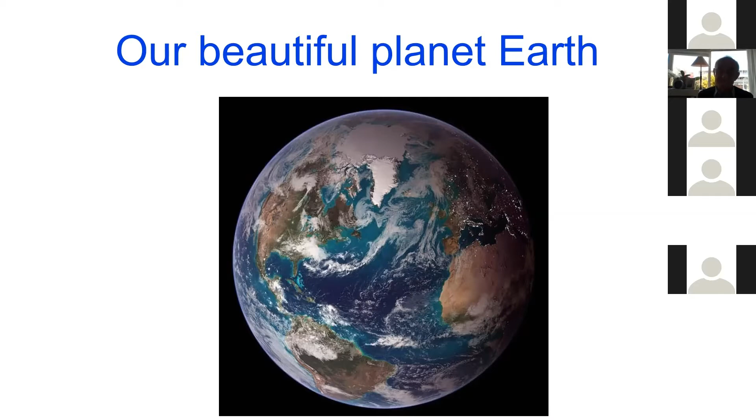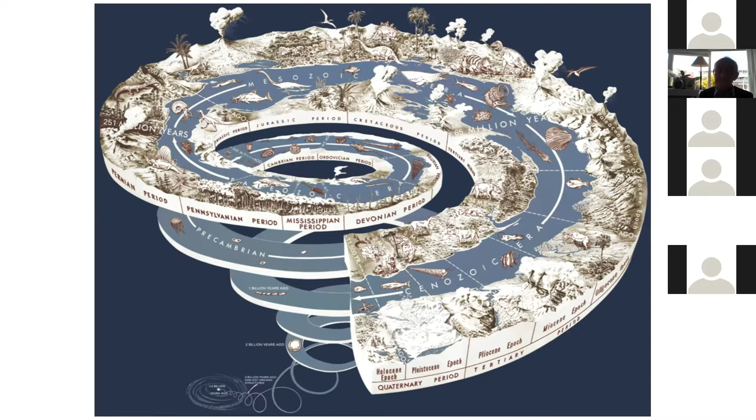So we have to do something—even without all these environmental and climate change problems—something basic, to change our way of living and consumption so that we bring it into balance. We have about 30 to 40 years to bring it into balance, and then develop a way of living in cities, in economy, in our activities that is in balance with what our planet can support. Otherwise, changes can be irreversible, and after that the big question is whether it will be possible at all to change.

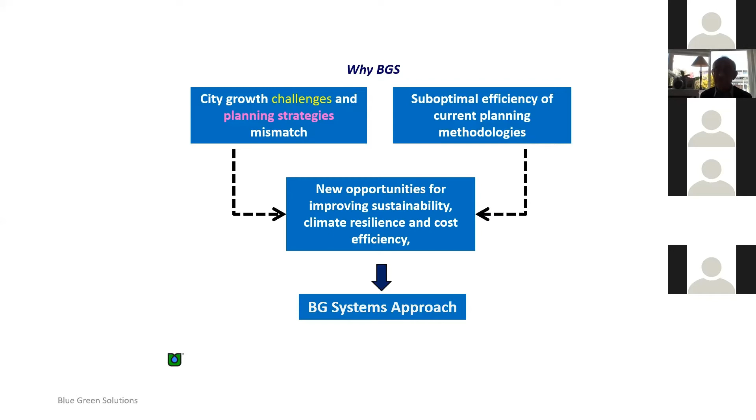This is a new need and new opportunity for improving sustainability, climate resilience, efficiency, and everything we do must be cheaper than classical approaches. That's what we call the blue-green systems approach, which I'm going to present to you today.

I told you not less than 20 years ago in France, 40,000 people died in 3 days just because of a slightly higher temperature which they were not used to. And that is connected to many other socio-economic problems.

Robbery, drug addiction, alcoholism, homelessness - we solve environmental problems, and there are very good examples in the world. For example, the city of Philadelphia: solving environmental problems significantly reduces socio-economic problems. That is linked, it's strongly correlated, and I will show you how.

We also have problems with energy efficiency and so on. So these are all things people see as a problem. We don't see it as a problem - we see them as a huge opportunity to change our brains, to change our philosophy, to change our planning methodology, to change our economy planning, and create new opportunities.

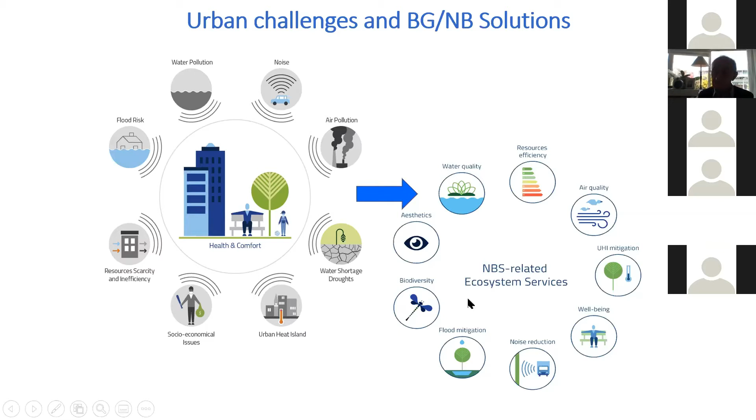That is environmental economy, environmental engineering - environmental systems are the economy of the future. I've seen already in some countries these environmental companies becoming much stronger, and they say in about 20 to 30 years, all traditional economies like oil, gas, and other types of energy will gradually be replaced, hopefully, by this new economy. This is a simple approach for how we can make it happen.

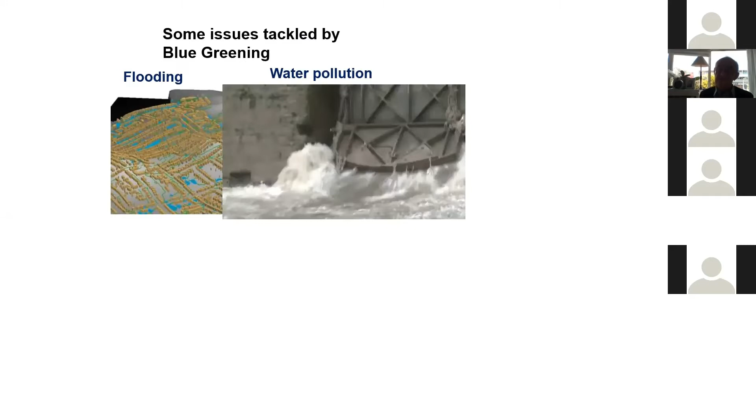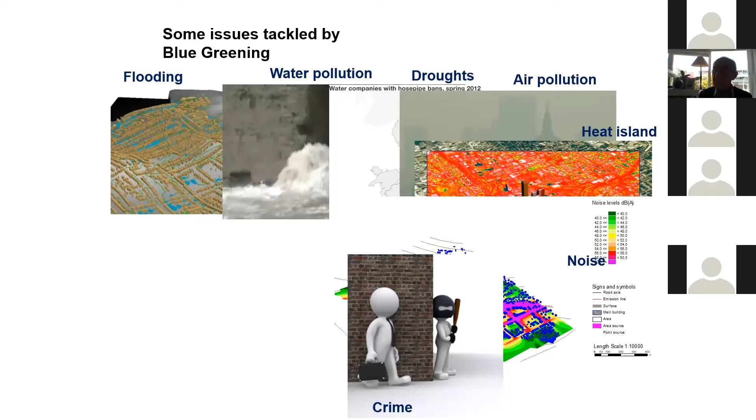Air pollution - this is not Beijing, this is Paris. Then we have noise and heat island - I mentioned how many people were killed by the heat island in France, and that happens every year. Noise, and then we also have the problem of socio-economic crime, which is much stronger in parts of the city with poor environment, where people do not have the luxury of enjoying green spaces. That is something very important for you.

Then we have urban agriculture. Food is becoming scarce these days - many shops are empty, but that is only a crisis; it doesn't have to be. Slowly we will need more food, and we have to grow more food near the place where we live. You won't believe it, but you can grow 30-40% of food in a city - on your balcony, your facade, the roof, the cellar, and so on. That is urban agriculture.

We need much more energy efficient systems. We are hoping that we will introduce renewable energy, wind, and so on. But at the same time, our technological systems are inefficient, they spend much more energy, so all this new renewable energy is being wasted. The biggest renewable energy is not spending more energy than it produces. I will show you some examples on wastewater treatment plants and heating and cooling buildings and so on.

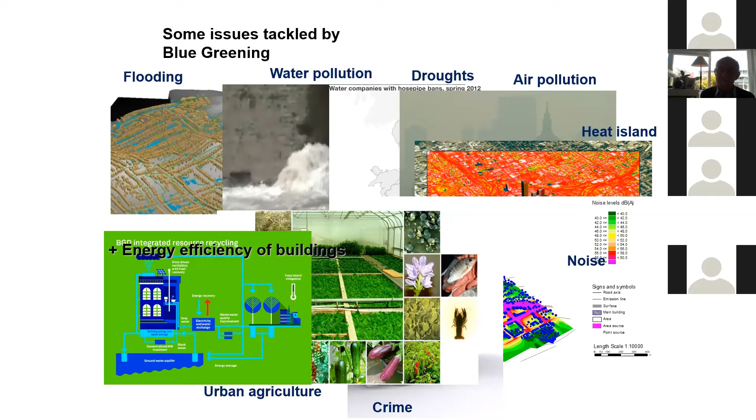In conclusion, with this blue-green philosophy we have developed, we will demonstrate to you how this philosophy works. People of the social background, sociologists, psychologists, economists, and people working in media have a very strong role, because without this group of people we cannot implement it. You can have brilliant technology, but if it's not supported, it's not accepted, it doesn't work.

This is the current system. We have many experts working, and everybody claims they have the best technology, they have green, they have zero carbon, zero whatever, but all of them are doing it a little bit separately, and there is no system.

We have developed this blue-green philosophy where we introduce this technology in the very early phase of planning - planning for economy, planning for cities, planning for new factories, planning for new hospitals. Everything can be done much, much better if it's done in the beginning, and if we bring all these people together and they agree on the environmental framework.

After that, they can go back and do their own job. Architects, environmental and transportation people can do that, but within the agreed framework. And that requires a change of our brains, our mental setup, our ways of doing things.

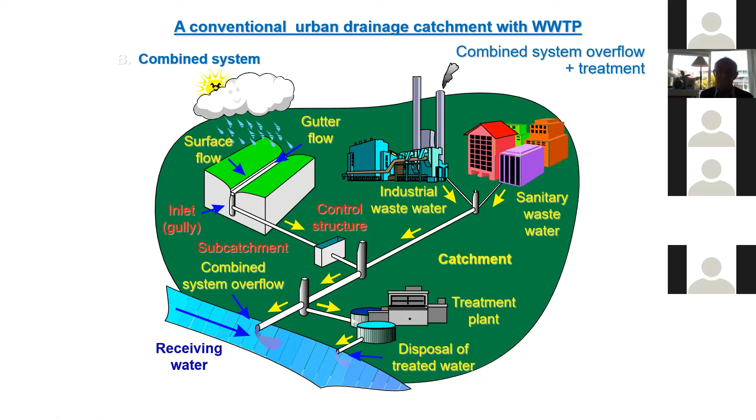And if we tap into groundwater - I'll show you an example from Paris - and use it for heating and cooling a building, immediately we reduce the waste, we recycle. We are already starting to implement this blue-green circular economy philosophy, and we are gradually converging to what we call cities of the future.

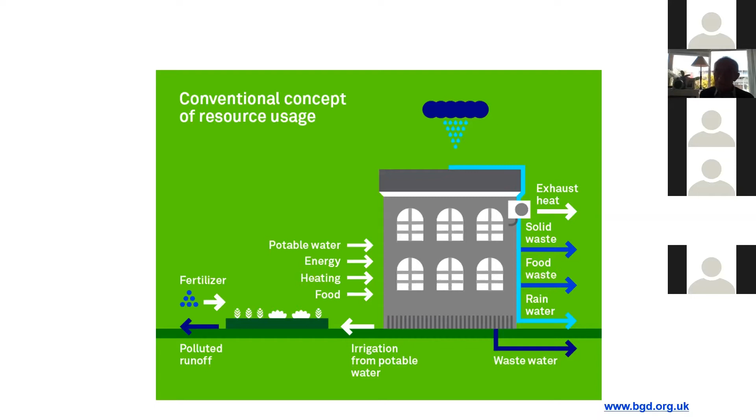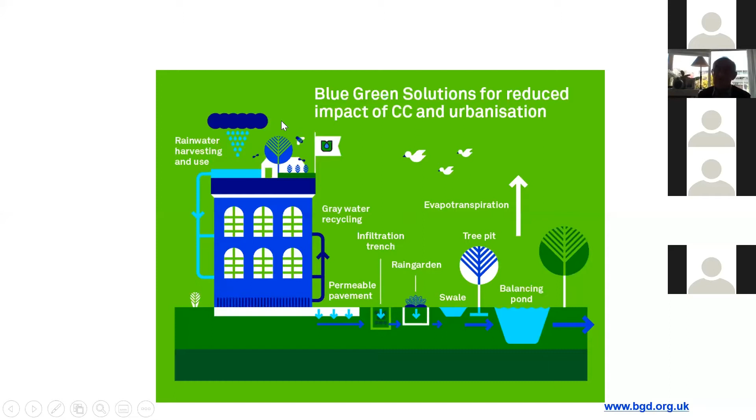So this is how it works. If we have the same house, if we harvest the water, if we use groundwater, if we capture the water after taking a shower, and take that energy which is in the wastewater and return it back to our boiler, and we use our green spaces around the area for improving things like evaporative cooling - all these are local resources which we can implement, and this is the essence of our philosophy.

For example, we don't just call it a green roof, but a multifunctional roof garden and green facade - they are not just there to be nice. At the moment, people are building green roofs just because they think it looks nice, but it looks nice and they don't even go to see it.

This other way, we put space on the roof where we can grow fish, we can have meetings, we can have a nice area where people can take a break, sit and stay there, drink coffee. And there's an excellent example - you can have beehives that produce honey. Honey produced in cities is even healthier than in rural areas because it doesn't have pesticides or herbicides.

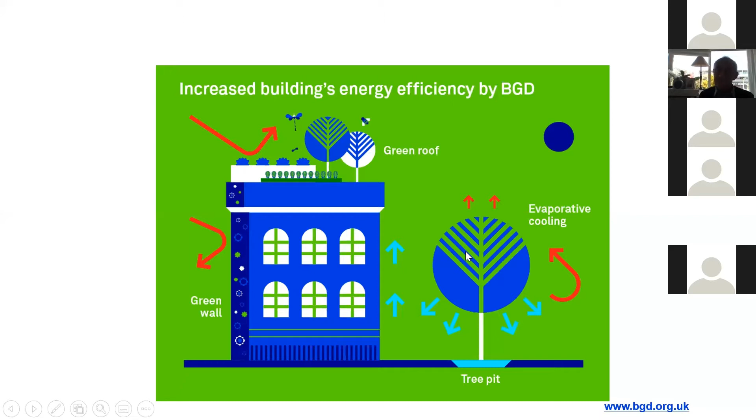Although cities are more polluted, at least the bees can collect without pesticides and herbicides, so unbelievably, honey produced in cities by these bees is healthier. And also, trees are not just trees - they have many other, about 30 different functions. They can be used for heating, cooling, and other purposes. So this is another example - we can grow food.

By growing food in Singapore, there are buildings which are already growing about 30% of the food they need. Cucumbers, beans, tomato, fish, everything in the building. Then we reduce the need for transporting food, we reduce the pollution and so on.

Biodiversity is very important. By our technology, we are killing many insects, bees, animals, and so on. We have to bring this element of biodiversity into the city, make it more pleasant, but also much healthier. At the moment, we've just received another European project on environment and health, and how we plan cities to be healthy, with partners from Poland.

So if we put all these things together, problems and solutions, we have what we call blue-green solutions. In essence, we have a system which is not just a story. There is a methodology, models, financial instruments, legal instruments that has to be quantified, and it has to be cheaper, better quality and cheaper. If it's more expensive, anyone can do it, but nobody can afford it. We have to make it cheaper, and we will demonstrate that it is possible.

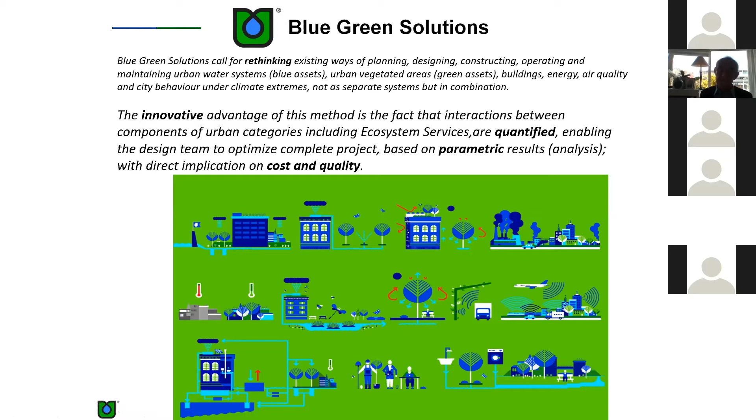We replace this traditional planning system with a new one. We introduce a system of collaboration between different disciplines - engineering, social, economical, cultural - and then there is a system for how we bring them together.

I can give you an example from the old part of Lisbon, called Alfama, a traditional touristic attraction place. We have done this, and it works. We bring all the elderly people, the economists, the cultural people, and it works. We have demonstrated it works.

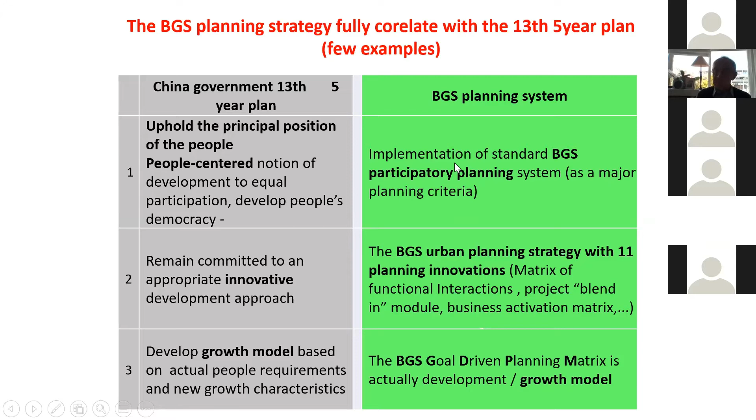Just as an example, the mayor of Beijing was the former Minister of Environment. He was our PhD doctoral student at Imperial, and he introduced a lot of emphasis on environment, improving the quality, and it works. This is another example.

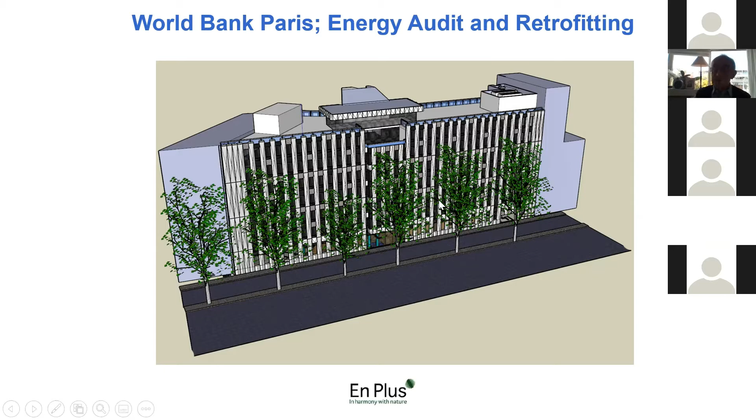This is the building of the World Bank headquarters in Paris. Our blue-green team won a project - there was a competition, a tender, to modernize and redevelop this building, and we got that project. We have done improvement of the heating, cooling, ventilation, green spaces, facades, and so on. That building now is saving every month 60% of the money for heating, cooling, energy, using very simple solutions.

We are using groundwater below the building, pumping it for cooling in summer, and in winter we are pumping back using heat pump heating, and then by improving the insulation, facade, and so on.

These people in the World Bank could not believe that it's such a simple, cheap solution. After that our team got 4 projects without any tendering. You know, this World Bank is very strict, they have to go through this public procurement procedure, but when we showed them this, they said how on earth can you give us this, keep quiet, just do the work. It was a better solution than anything I had seen. The World Bank simply gave us 3 more contracts without any tendering.

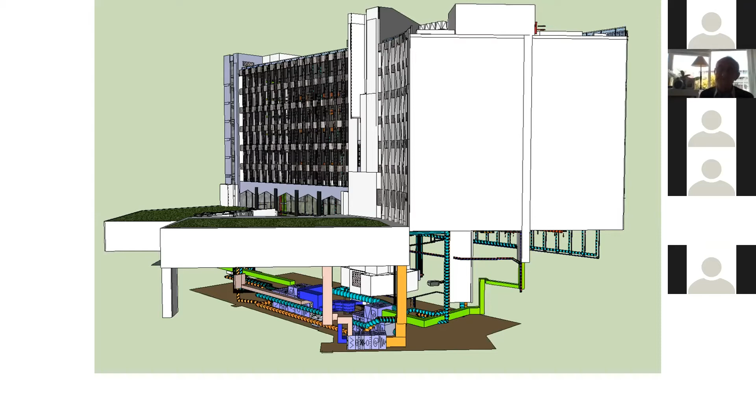Just say, this is the contract, do it. Do the same method. We've done it in several countries, improving their headquarters. The philosophy is that you can...

In America, they have already done 130 river redevelopments. In Seoul, South Korea, that Cheonggyecheon project was so popular that Lee Myung-bak, the former mayor of Seoul who made this project, was elected president of South Korea after that project.

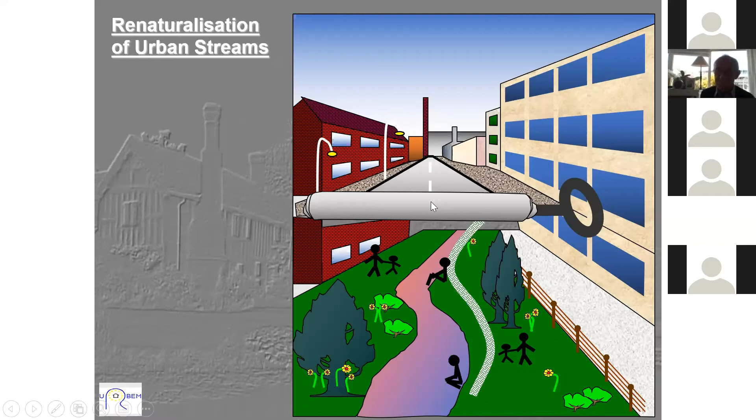Okay, so this is just an example. I'll give you a few more examples of how this technology can be implemented, as I said, in cities, whole city, district, but also particular systems like technology parks, university campuses, hospitals.

A few years back, I was told we would be working with a big hospital in Warsaw, but it didn't happen, I don't know why. So I'll give you some examples from the university campus in Zagreb, how we planned it at Imperial College, at ENPC, École Nationale des Ponts et Chaussées in Paris, and in some Chinese cases.

Just a few examples: university campuses, when retrofitted or newly designed, can be done in such a way that they are blue, green, efficient, but also used as an open-air laboratory.

This is an example from Zagreb, a city in Croatia. They are planning to move university buildings, which are now spread all over the city, into a former military airport. We have done the planning for them together with local architects to see these corridors. Strong winter winds come from this side.

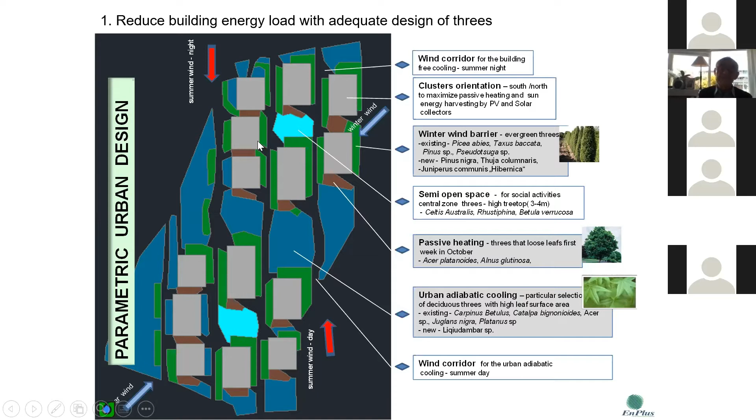We protect facades with a certain type of vegetation. In summer, there is a lot of hot weather, so we protect facades with other sets of vegetation, so they lose less energy for cooling. We provide wind corridors and use groundwater for energy saving. In the end, this campus has a much more pleasant environment, much cooler temperature in summer, using much less energy.

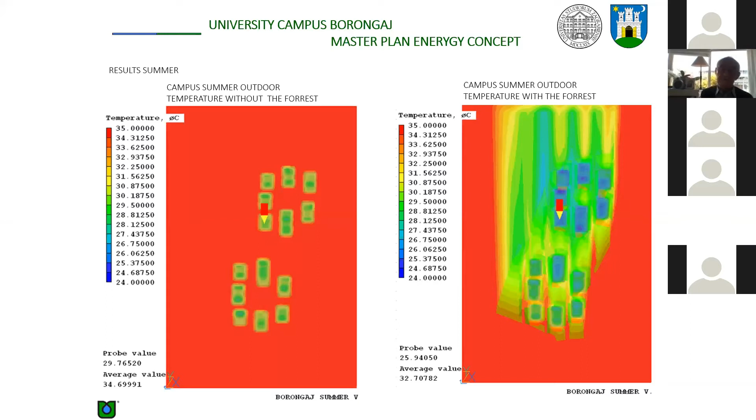In the end, they will also save, if they implement this completely - this is still in the planning phase - if they implement it, they will save 60 to 70 percent on heating, cooling, ventilation, and so on. I will show that slide later.

So university campuses themselves can be places where we implement this, not just to serve the services, but also to serve as an exemplar, as a research facility to show how it works, and then it can be modernized in the future.

One small piece of roof can be done, and it not only looks nice, but it also absorbs water, improves air quality, reduces flood risk, looks nicer, and saves energy for heating, cooling, and so on.

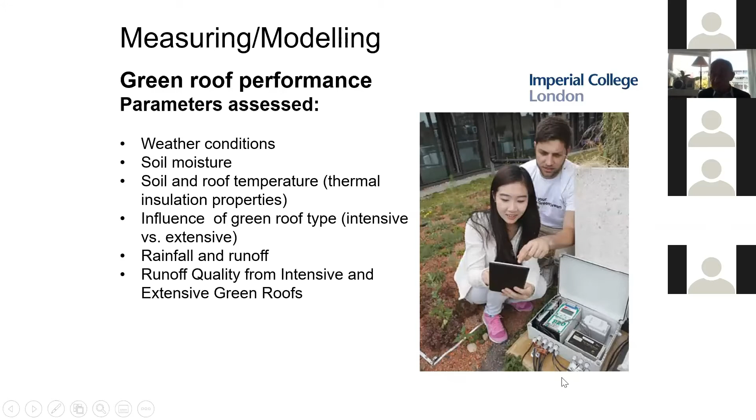But it requires a lot of research. We have done it, we can develop this methodology. This is another example from Paris.

ENPC, École Nationale des Ponts et Chaussées, is the strongest university in civil engineering. This was planned to be a green roof, but in the process we redesigned it, the architects also redesigned it. It is an open air research facility with a lot of instrumentation studying rainfall, runoff, radar and rainfall prediction, water balance, and energy balance. There are 4 or 5 doctoral theses already done. One was supposed to be defended last week, but it was cancelled because of the corona.

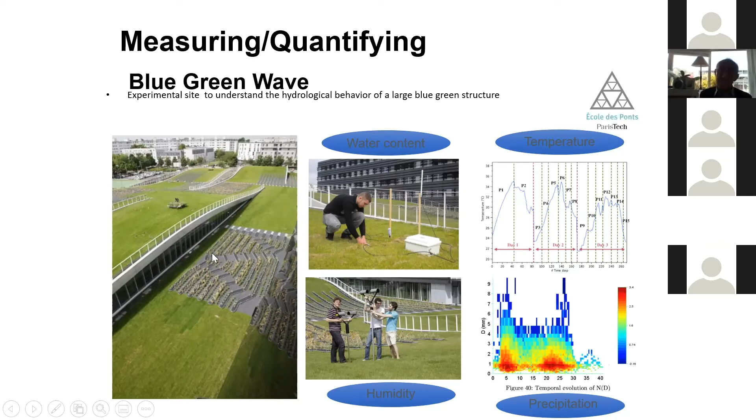But it is an example. You should do it not in the classical way, but if you just change a little, you can get much more additional benefits.

Now another example of implementation of this blue-green philosophy is the wastewater treatment plant. I know that in Poland, for example, I visited some places, there are some very good wastewater treatment plants, in Łódź for example, and somewhere else. But they are good, they occupy too much land, and they are very expensive to run, using a lot of energy.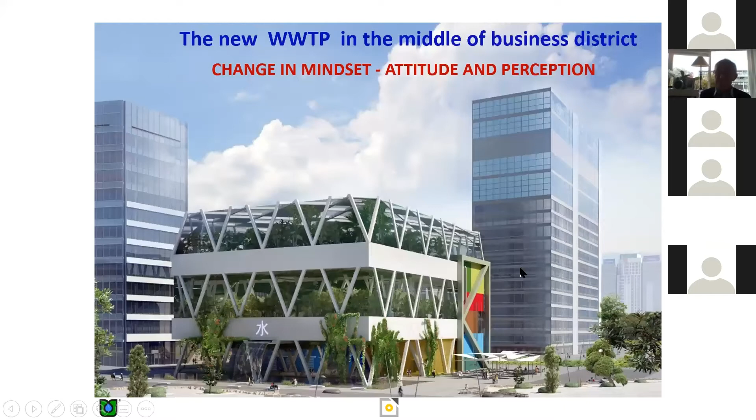When he pays all the costs, he can make a profit of $22 million. But he will not do that, he will use this land to develop hospitals, hotels, banks, and residential areas, making a much bigger profit. So this is an example of how this new technology could be very attractive financially, in addition to being much cheaper. This wastewater treatment plant occupies only 6% of the land, and it is economically profitable. This is just an example, we are now working with a lot of partners from China and other countries.

Socioeconomic aspects - I'm switching to this bit because my understanding is your group of students, your professionals, have this background. And as I said in the beginning, we cannot implement this technology only with good engineers and planners. We have to involve first of all the political system, ministries of environment and cities, to change the legal framework to enable this technology.

For example, in some countries, even in Germany, they say this is good technology, but our law does not permit using treated wastewater. Good, what does that mean? We have to change the law rather than just keep on going. That aspect involves all the other professionals, including economists, and social and political scientists.

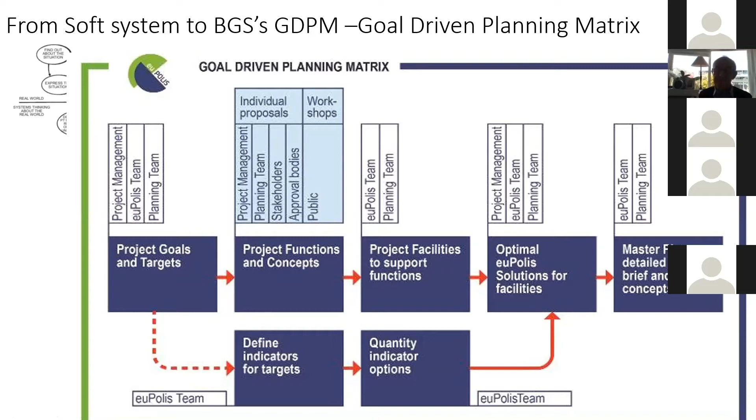Now, this is a very important slide. This is a summary of all these planning methodologies. This one is the goal-driven planning matrix, what I showed you here. This is the umbrella matrix, which brings everything together. But you will see other matrices. I will just give them the names.

You see there's a lot of socio-economic aspects, so a matrix of interactions between components: energy, transportation, green spaces, health. We have to look at all these interactions. Capital costs - we have to make sure our system is cheaper. It will be cheaper if we include what we call whole life costs.

Gender matrix - this is very important. People are laughing at us, asking why are you interested in this, men, women. But it's not only about men and women, it's also about other aspects like social vulnerable groups, underprivileged groups, the entire population, and how we do our plans so that these people have benefits.